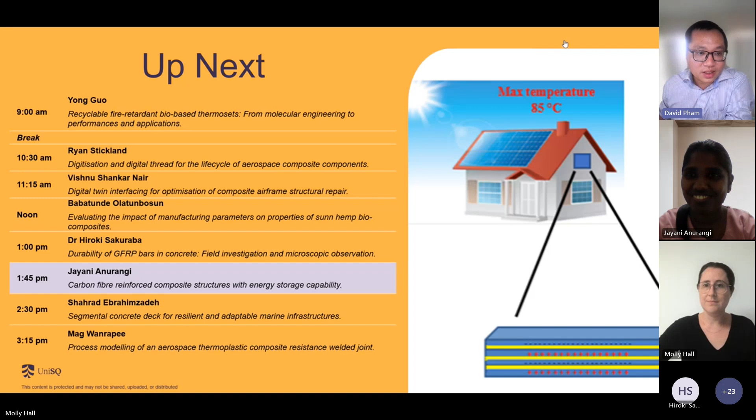Jayani, please share your presentation. Yes, I'll. Can you please share your slide? Yep. Hope everyone can see my screen. Yep. Over to you now. Yes, thank you so much.

I am Jayani Anurangi. Today I'm going to present my research study done for my PhD program, the development of carbon fiber reinforced composite structures with energy storage capability. My principal supervisor is Professor Jayantha Epaarachchi. I have divided my presentation into 4 sections: introduction, research aim and objectives, results and discussion, and conclusion.

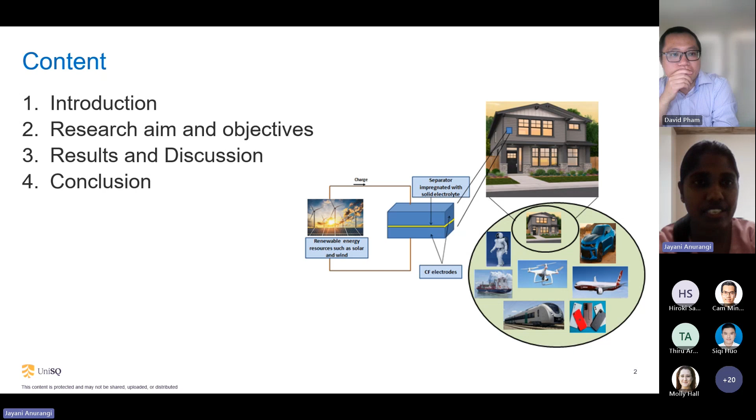First of all, I'll give a brief introduction about multifunctional energy storage composites. Multifunctional energy storage composites can sustain electrochemical energy while bearing mechanical loads. It can go beyond smart structures. Normally in smart structures, we use 2 materials to get 2 functions. But in multifunctional composite, we can get 2 or more functions by using 1 material.

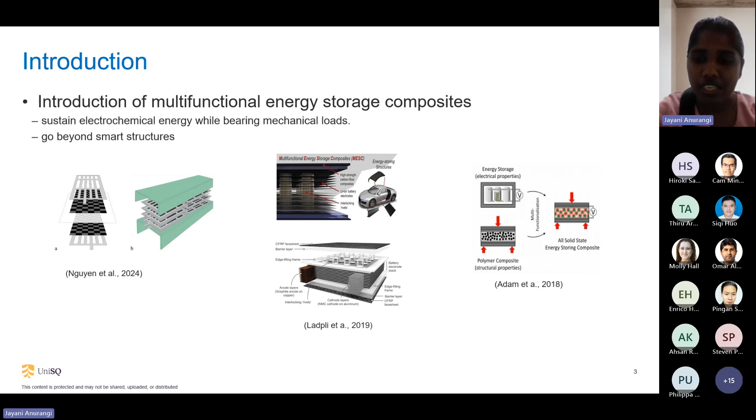Here I have illustrated a few recent developments related to smart structures. In the first illustration, they have embedded supercapacitors to store energy in the structural components. In the second illustration, they have embedded lithium-ion batteries in the structural components to store energy. In my research, I developed a supercapacitor functional energy storage composite, a structural supercapacitor.

Supercapacitors have many advantages compared to other energy storage devices because they have a laminated structure, which is similar to composite manufacturing, and they can be easily integrated into structural fiber reinforced polymeric components. Supercapacitors also have advantages in electrochemical properties: high balanced energy and power density, low charging time, and high cycle life, etc.

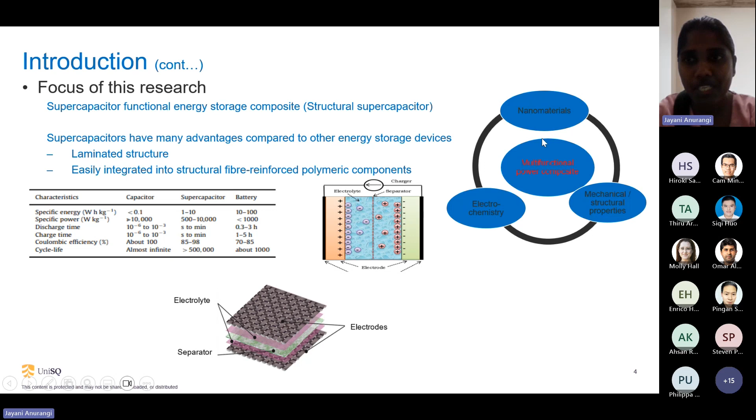In a supercapacitor, there are 3 main components: electrode, separator, and electrolyte. Developing a structural supercapacitor combines 3 areas: nanomaterials engineering, electrochemistry engineering, and mechanical engineering. After a comprehensive literature review, 3 research gaps were identified in the field of structural supercapacitors. The first one was that the electrochemical properties are still too low for real-world applications.

As shown in this figure, structural supercapacitors are suitable for many engineering applications such as electric vehicles, civil infrastructure and aerospace applications, but their properties are still too low for those applications. Therefore, more research is required to increase the electrochemical properties.

Also, those applications are always exposed to severe environmental conditions. Therefore, the structural supercapacitor should be able to tolerate harsh conditions such as elevated temperatures. However, the research community has not yet addressed that aspect. In addition, innovative designs are required for enhancing the electromechanical properties, because most researchers are still trying to improve the properties of individual materials, and innovative designs have not been found so far.

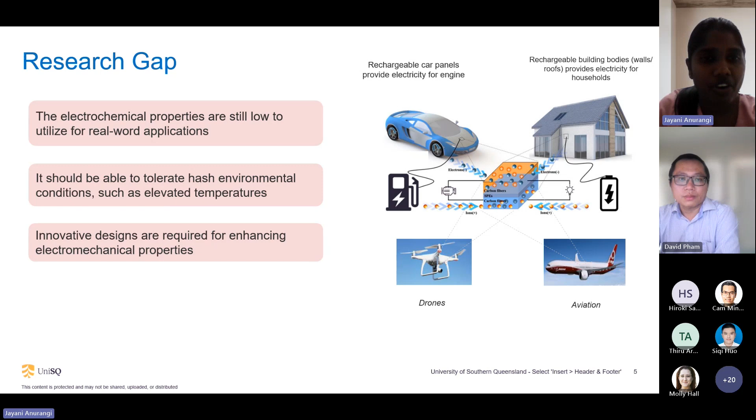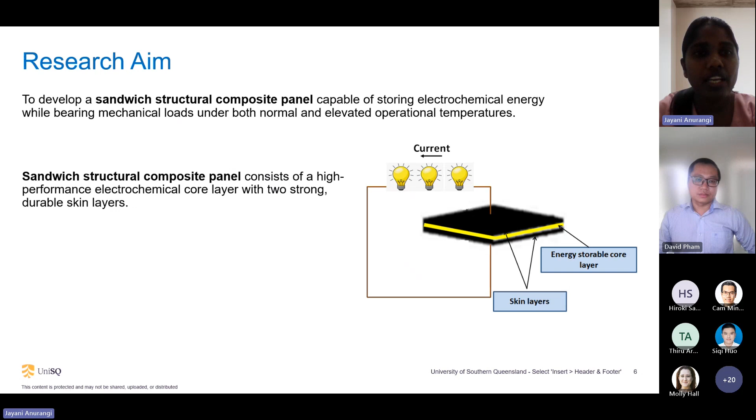The aim of this research is to develop a sandwich structural composite panel capable of storing electrochemical energy while bearing mechanical loads under both normal and elevated operational temperatures. As shown in this figure, I developed a sandwich structural composite panel which consists of a high-performance electrochemical core layer with two strong durable skin layers.

There are three main objectives: development of the core layer, development of the skin layer, and development of the sandwich composite. For the core layer, I have two specific objectives: to develop a structural supercapacitor for elevated temperatures up to 85 Celsius, and to improve the electromechanical properties of the structural supercapacitor composite by incorporating graphene nanoplatelets.

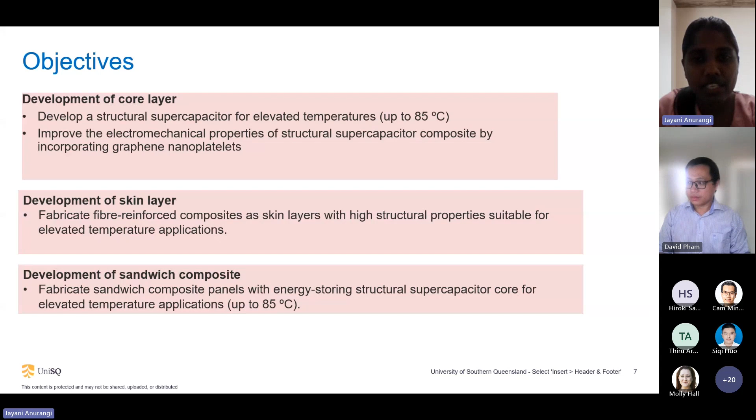For the skin layer, my specific objective was to fabricate fiber reinforced composite skin layers with high structural properties suitable for elevated temperature applications. For the sandwich composite, my last objective was to fabricate a sandwich composite panel with an energy storing structural supercapacitor core for elevated temperature applications.

Regarding the significance of this study, the developed structural supercapacitor has energy storage capability while bearing loads. Therefore, it will expand the application spectrum of fiber reinforced composites. The developed composite panel can store electrochemical energy even under elevated operational temperatures.

Therefore, it is suitable for civil infrastructure applications such as roofing sheets and wall bricks, which are frequently exposed to elevated temperatures up to 65 Celsius, sometimes 85 Celsius in the case of fire. Since the developed structural supercapacitor is stable up to 85 Celsius, it is suitable for civil infrastructure. In addition, the findings will contribute to numerous engineering applications, including portable electronic devices, electric and hybrid vehicles, aerospace vehicles, and beyond.

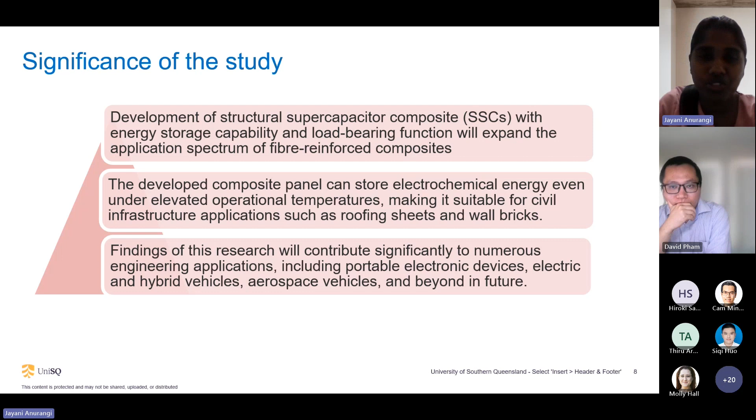From here onwards, I am going to present the findings and achievements of my project. My first objective was the development of a structural supercapacitor composite for elevated temperatures. These findings were presented in the journal article titled Electrochemical and Structural Performances of Fiber Reinforced Structural Supercapacitor Composite at Elevated Temperatures. In this research, I developed a structural electrolyte based on bisphenol A, which is suitable for elevated temperature applications. In preparing the structural electrolyte, I mix ionic liquid with the bisphenol A.

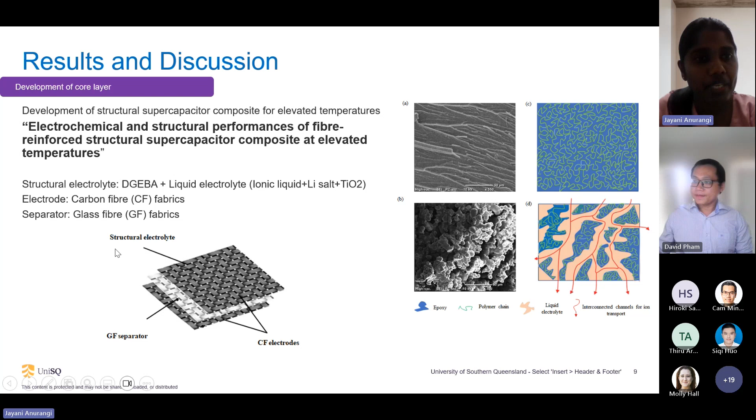Therefore, it has the ionic conductivity in the developed structural electrolyte. In this supercapacitor, I use carbon fiber fabrics as the electrode and glass fiber fabric as the separator.

When evaluating the performance of the structural supercapacitor, I evaluated electrochemical and mechanical properties. Cyclic voltammetric test and galvanostatic charge discharge test were done to evaluate the electrochemical properties. I used the Autolab potentiostat, which is located in Springfield campus, to measure the electrochemical properties. Mechanical properties were measured based on the tensile and flexural tests.

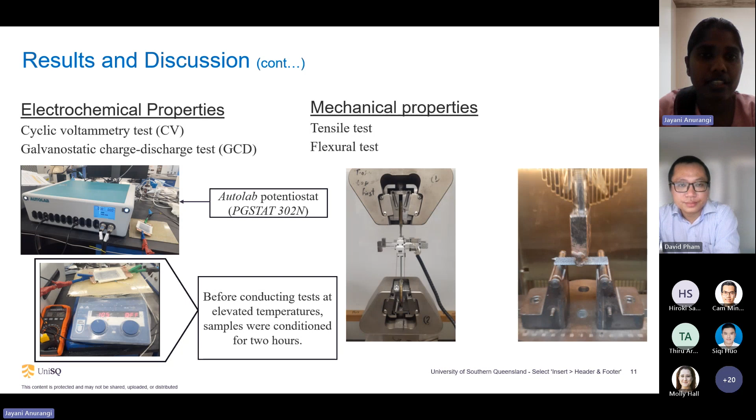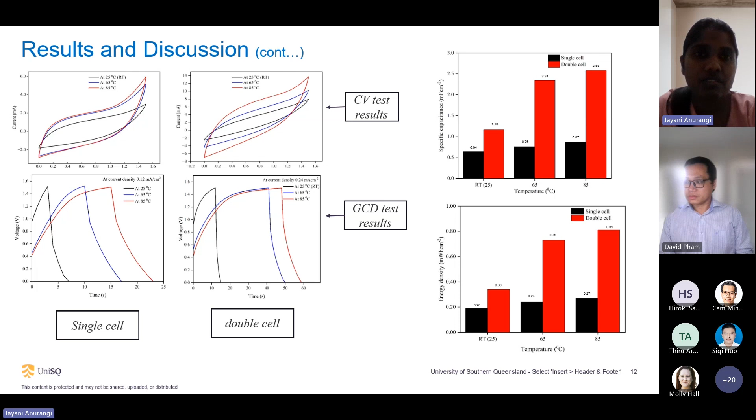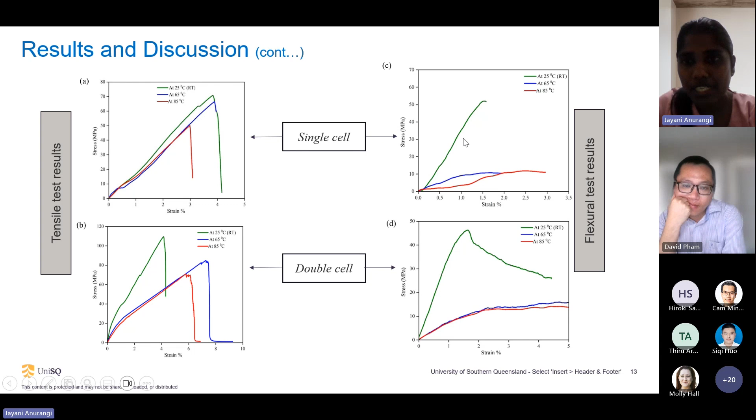And also according to these graphs, the double cell structural supercapacitor always has higher specific capacitance and energy density. It is obvious because the double cell supercapacitor has 2 cells to store energy. This graph shows the mechanical properties. Both tensile and flexural properties have decreased with the temperature. Especially, the ultimate flexural strength has reduced to less than half when the temperature increases.

My second objective was to improve the electromechanical performance of the structural supercapacitor composite by incorporating graphene nanoplatelets. These findings were presented in the journal article titled Electrochemical and Structural Performances of Fiber Reinforced Structural Supercapacitor Composite at Elevated Temperatures. In this project, I use graphene nanoplatelet coated carbon fiber fabric as the electrode.

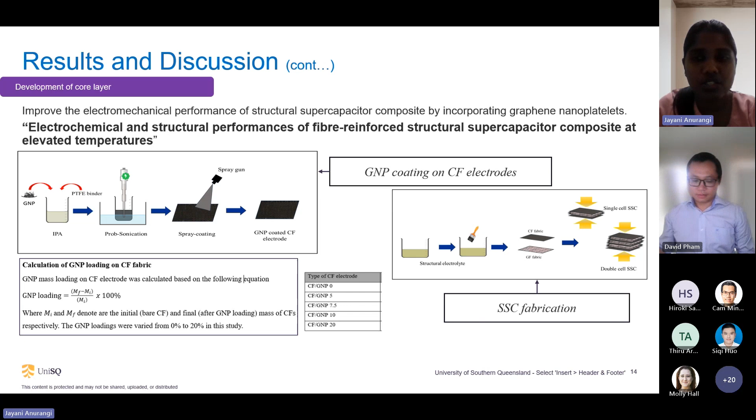I prepared the GNP coated carbon fiber fabric like this. Firstly, I dissolved GNP in isopropyl alcohol, and PTFE was used as the binder. Then the slurry was sonicated for 30 minutes and sprayed on the carbon fiber fabric. Then I varied the GNP loading on the carbon fiber fabric from 0% to 20%, prepared 5 types of GNP coated carbon fiber fabrics, and prepared 5 types of structural supercapacitor based on these 5 electrodes. Then I evaluated the mechanical properties based on tensile and flexural tests.

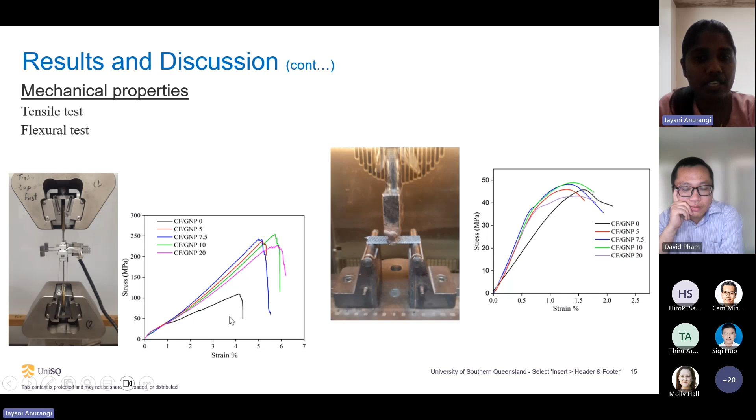after GNP coating. In addition to these two tests, I evaluated the durability of the developed structural supercapacitor, because in developing it, I use GNP coated carbon fiber fabric. So when I increase the electrochemical cycles, the coated GNP may detach from the surface, and with time the performance may reduce. Therefore, to evaluate that, I evaluated the capacitance retention percentage after 5,000 cycles.

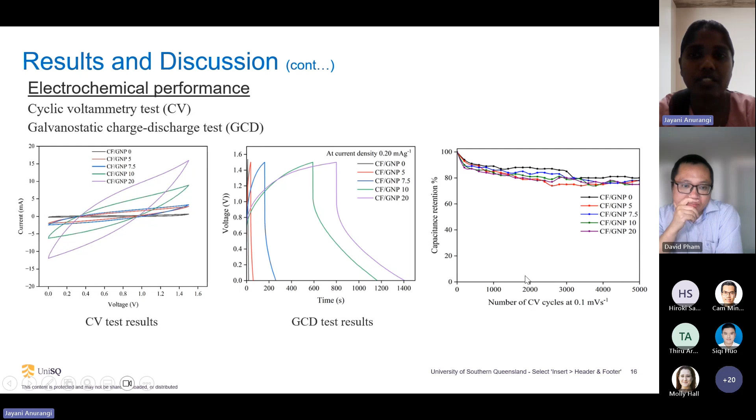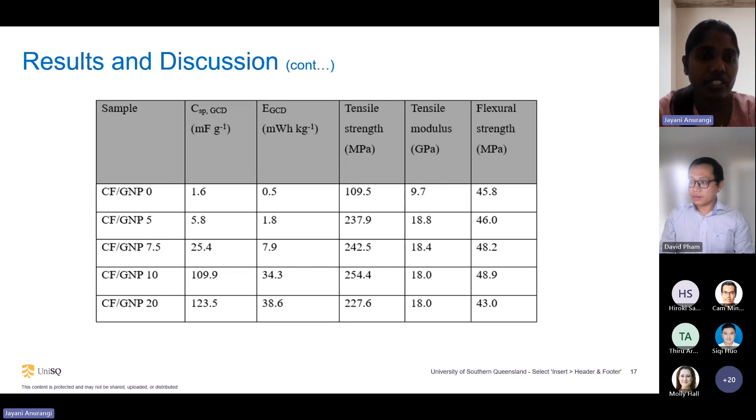According to these results, there is no significant reduction in the capacitance retention even after 5,000 cycles. Therefore, the developed structural supercapacitor is a durable structural supercapacitor. According to this table, almost all properties, capacitance, energy density, tensile, and flexural, have improved after GNP coating.

My next objective was to fabricate a fiber reinforced composite as the skin layer with high structural properties suitable for elevated temperature applications. In this research, I developed a GNP modified carbon fiber nanocomposite. For that, firstly, I dissolved GNP in the bisphenol A epoxy. Then the solution was manually stirred for 10 minutes, and then sonicated for around 30 minutes. And then TETA hardener was used as the crosslinker.

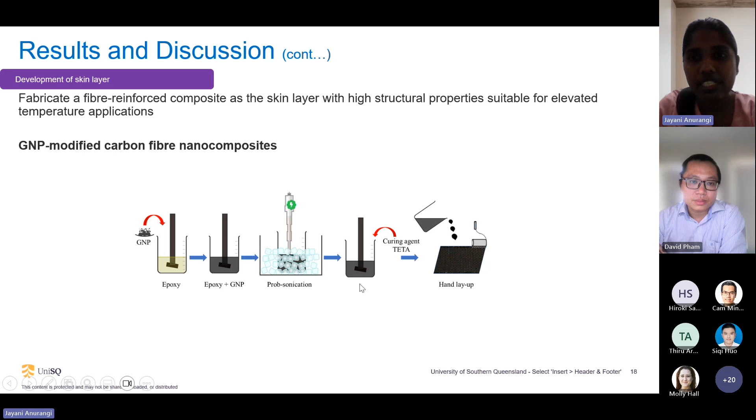Then after preparing the matrix, I fabricated the GNP modified nanocomposite by using 6 layers of carbon fiber. I used the hand layup method followed by the vacuum bagging method to fabricate this composite. Since I have planned to use this nanocomposite as the skin layer for civil infrastructure applications, I evaluated the mechanical

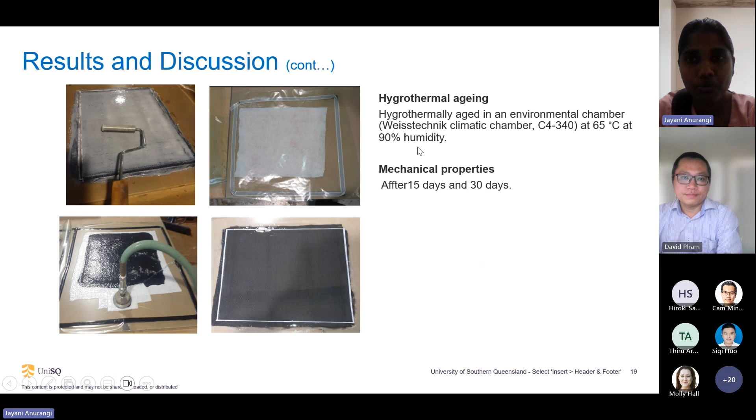properties of the developed composite at an elevated temperature of 65 Celsius, and I also conditioned the samples in the environment chamber at 65 Celsius and 90% humidity for 15 days and for 30 days, and then I evaluated the mechanical properties, especially the tensile properties. Here you can see I evaluated the tensile properties without aging, after 15 days aging, and after 30 days aging, at room temperature as well as at 65 Celsius.

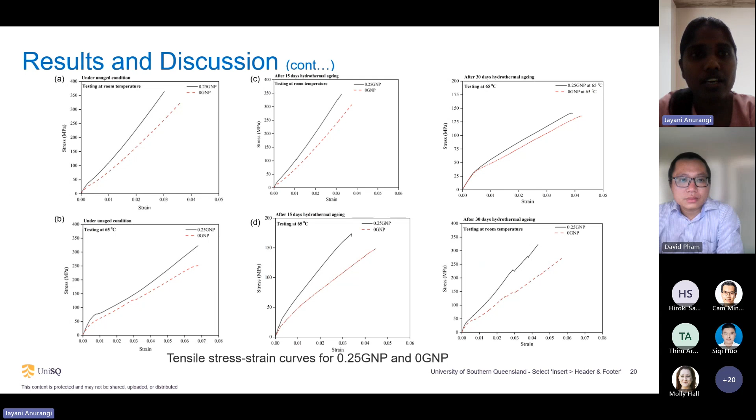According to all these results, it was noticed that the GNP modified nanocomposite has higher structural properties than the control sample, which was fabricated without GNP. And also the GNP modified nanocomposite has high structural properties suitable for elevated temperature applications.

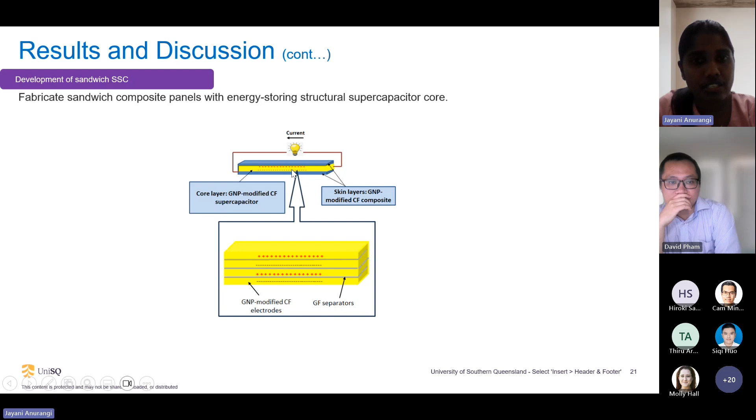After developing the skin layer and the core layer, my next objective was to fabricate a sandwich composite panel with an energy storing structural supercapacitor core. As shown in this figure, I prepared my sandwich composite. The layers were bonded using two-system structural epoxy, and the sandwich composite was fabricated using the hot pressing method. The electrochemical properties depend on the core layer, and the structural properties depend on both the skin and core layers. After fabricating the sandwich composite, I evaluated the electrochemical properties and mechanical properties.

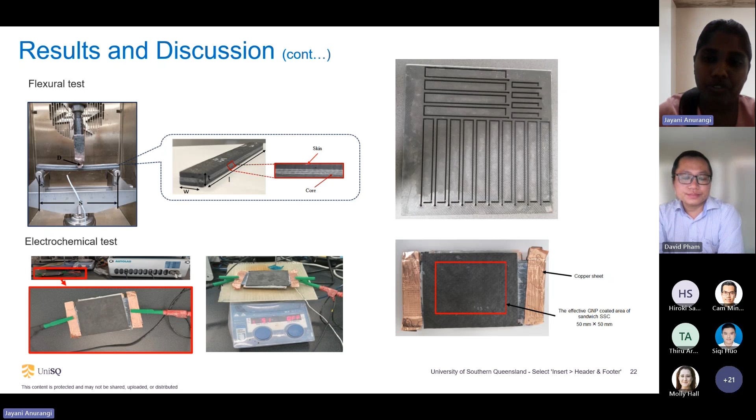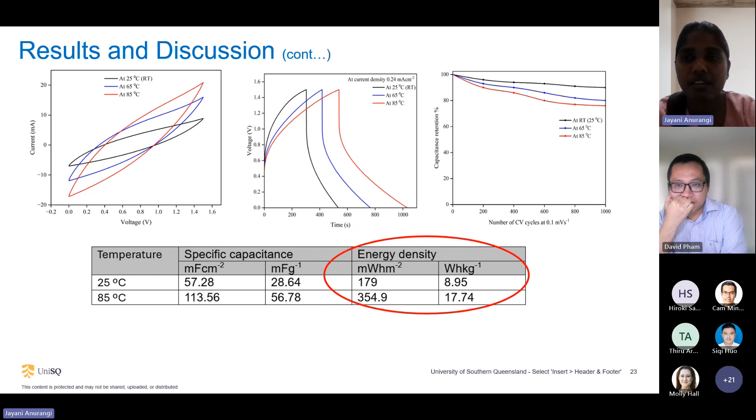For my final sandwich composite panel, I evaluated the energy density with respect to the area and with respect to the weight. The final sandwich composite energy density is 179 milliwatt hour per square meter and 8.95 watt hour per kilogram. In addition to these two tests, as earlier, I evaluated the durability of the sandwich composite at 3 different temperatures. It was noticed that at each temperature, the developed panel has more than 75% capacitance retention.

As the next step, I evaluated the potential of the developed sandwich panel in real world applications. I calculated the panel area required to light a typical 10 square meter room. Typically, the lighting level requirement is 160 lumen per square meter, so a 10 square meter room needs 1600 lumens. Using the 7-watt Osram LED bulb, I have to light 3 bulbs to meet the lighting requirement. If the duration is 5 hours, I need 105 watt hour of energy. Using my developed composite, I would need 586 square meters of sheet to light up this room. However, this is a very large area.

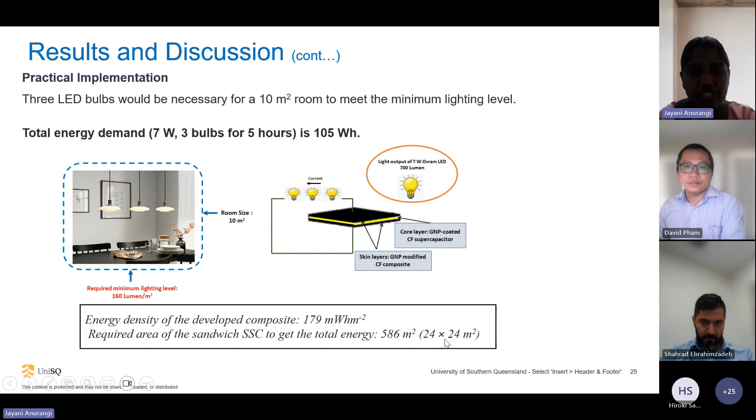Therefore, as the conclusion, I calculated what happens if I increase the number of cells in the core layer, because my developed sandwich composite has 2 cells. If I increase it to 64 cells, the total panel thickness increases to 84 millimeters, but the size is reduced to 4x4 dimensions, which is an acceptable size. Using this panel, I can light up the typical room for 5 hours with three 7-watt LED bulbs. The total panel weight will be around 11.73 according to the density. That is the conclusion of this project: using this much weight, I can light up a typical room for 5 hours.